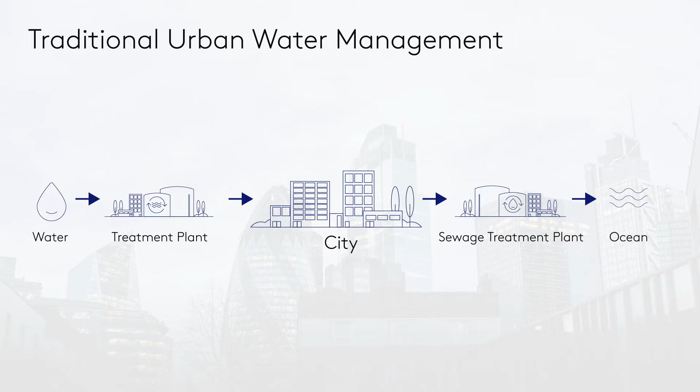And it's very good so far as it goes, but we're now seeing a lot of challenges in our cities that we need to address that aren't covered by that model. So it didn't consider things like the rainfall that was landing on the buildings in the city and how we might use that. It didn't really consider the whole issue of stormwater. They just included stormwater in their wastewater management, which has created another set of problems for their creeks and rivers.

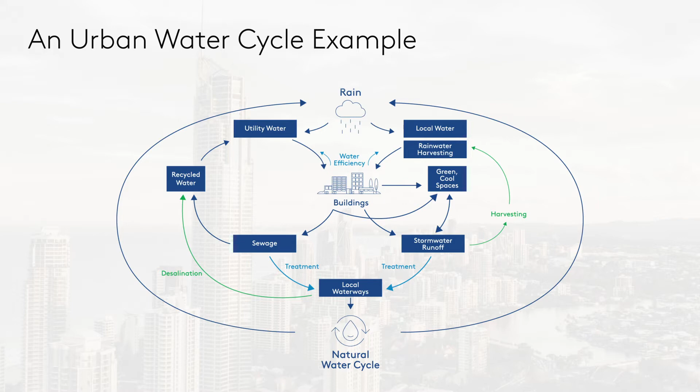So we think we need to change that language a bit. We need to be talking about a system, an urban water cycle that's happening, more discussion about the impact on the natural environment, and then obviously how buildings become part of that. And in order to understand the important role of buildings, we really need to look at how an urban area changes when it goes from a natural landscape, which is mostly grasses and forests, to a built-up environment.

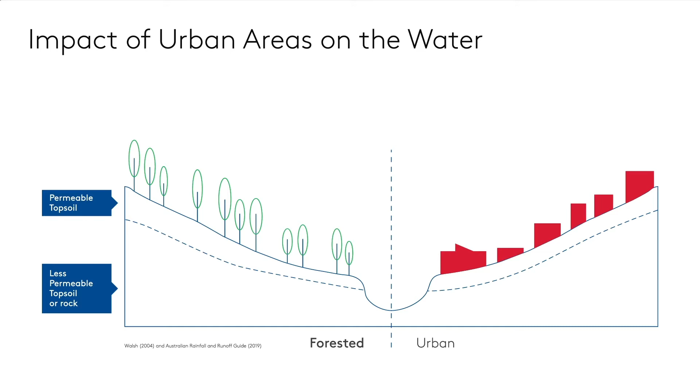And it's interesting to look at the numbers here. So in a more natural landscape, the landscape retains about 80% of the water. And that either infiltrates into the soil and becomes groundwater, or it evaporates and has a cooling effect, but it also becomes water vapor and can land again as rainfall.

When we urbanise, we see a very big shift. Instead of 80% of that water being retained, 80% of the water becomes runoff. So it very quickly runs off that landscape. So we have quite negative impacts on our waterways. We see flooding and we see scouring and a loss of that ecological habitat.

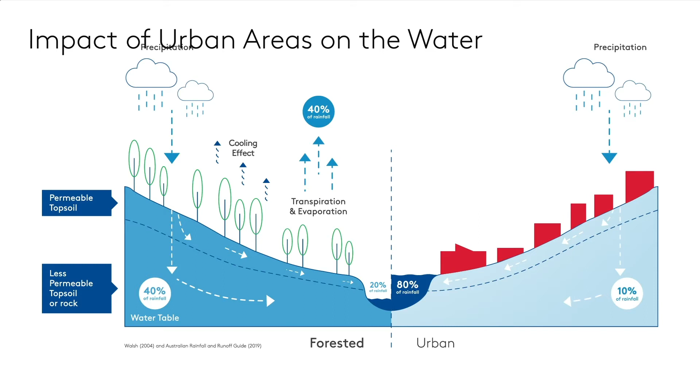But we also don't see groundwater. So the base flow, when it's not raining, we see a lot less flows in those local waterways. And we also don't see the levels of evaporation and evapotranspiration that have a really important cooling effect for our cities, but also create more rain.

So, one of the ideas that we start to talk about is that our cities are becoming deserts. We're seeing less rainfall, they're getting hotter and windier, and when it does rain, we're seeing flash flooding. So it's a pretty negative image, but it's one that we need to think about. And the great thing is that buildings can then become part of the solution and address all of those impacts to replicate that natural environment.

That's a great segue. Thanks, Michael. So if we did want to take a look further at the buildings, I think it's worthwhile to take that thought that buildings can be part of the solution rather than part of the problem. And that by changing the way that water is managed at an individual scale, at a single building or in a suburb or a town or at a wider scale, we can actually change the impact of a whole city and a built environment on the natural environment.

So we see an example of this where we're using now a lot of decentralized solar PV to generate electricity. So we don't need to rely on a great big infrastructure solution, and we can get small inputs coming into the system in the local area with less transportation and less infrastructure required.

We can use our buildings and think about our buildings in three different ways. The first being that we make them more efficient than they were before, so they consume less inputs from the external world, and that's things like insulation for power and heating, cooling costs there. But in a water sense, it's things like water efficient appliances, shower heads, taps, washing machines, things like that.

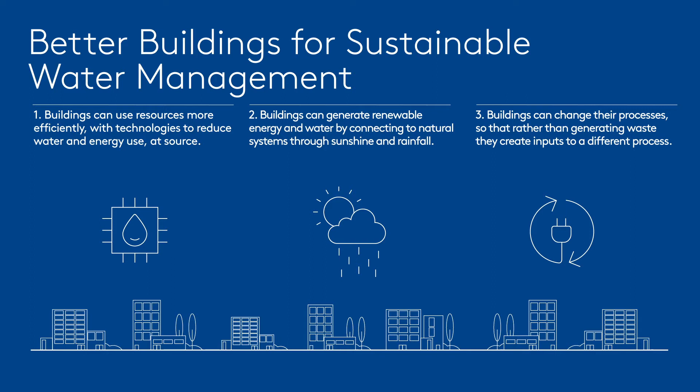So with these things in place, we can actually end up with a building that has a net positive effect. It's actually generating more than it's consuming. And you think about that in terms of rolling that up into a city scale, the buildings can actually make a massive contribution to the way a city's performing.

Stuart, one of the things that I'm hearing about a bit is this idea of a crisis, so that there's a sense of urgency around some of these issues and these changes. Do you think that there is a crisis? Is that something we're looking at?

I think you don't have to look too far to see examples of the impact of climate on cities, and in particular hot, dry summers and shortage of utility water supply. And we've seen notable examples in Cape Town and Atlanta in the last few years where whole cities of millions of people have been running short of water. And then at the same time, we get stories about whole cities having enormous amounts of floods and extreme weather events leading to peak flow of stormwater and flash flooding.

Both of these are very damaging problems and seem to be coming up more and more frequently in the last 10 and 20 years. Particularly what we know about the flooding situation is that it's a massively expensive problem. Floods are hugely damaging for cities, and we're seeing impacts there in the insurance industry where it's no longer cost effective or available to get insurance in some situations because the risk of flooding is too great and the cost associated is too much. It's interesting.

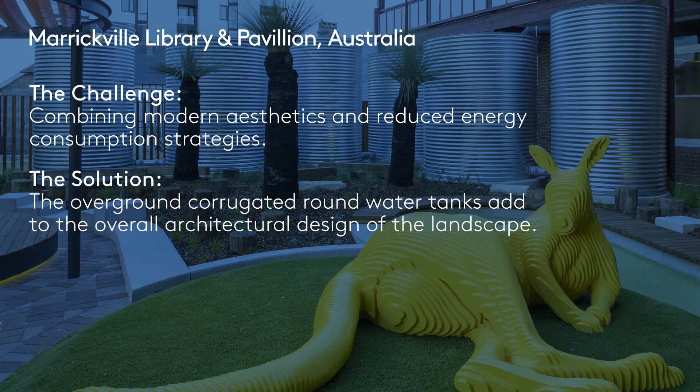And here in the picture you can see in the courtyard next to the library they've installed 6 large Kingspan rainwater tanks. This is an iconic Australian corrugated steel product in an Australian native landscape garden there. The 6 tanks store about 57,000 litres, capturing water from the roof of the library and filling up those tanks there. And then the water is reused into the public toilets and facilities inside the library there.

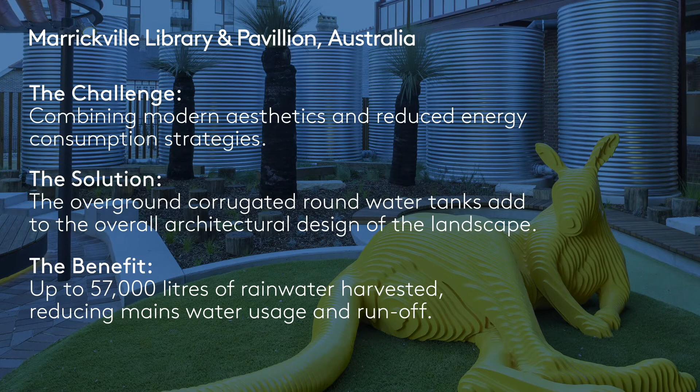So these 6 relatively small tanks have the ability to save about 400,000 litres of water a year that would otherwise have been piped in from a dam many kilometres away. So it's a really great example of using the water, reusing the water on site where it falls without having to treat it and without having to pump it long distances.

This site also, when these tanks overflow, which they do a few times a year, the water from that runs into an underground stormwater retention basin and is further slowed down and treated before it's let into the stormwater network. So it's quite a good integrated system there, and we've got a really visible example of using rainwater where it doesn't need to be hidden away, and it's part of a feature of a landscape garden as well. Yeah, it works well.

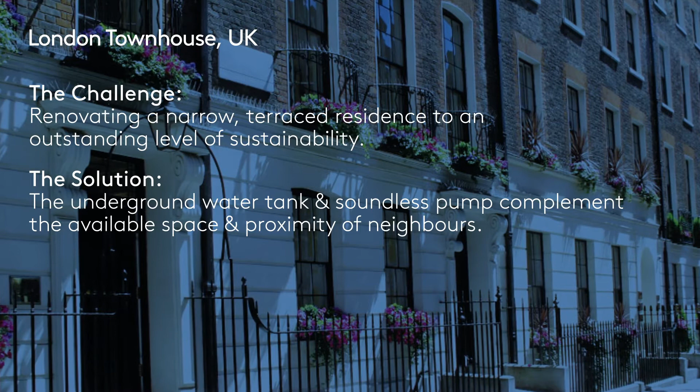And then they transfer the water up into a header tank in the attic space, and then the water is released by gravity down to flush the toilets through the whole building, and I think used for some irrigation in the gardens as well. So this is a really compact lot scale example of stopping the rainwater from leaving the site, reusing it through the appliances in the building, and just minimising the impact of that development on the natural environment.

Stuart, I'm curious on something like that. Are we talking very technical equipment? Is it a very expensive installation? No, that's a pretty straightforward installation. They'd have 2 small tanks there and 1 small pump, and it's quite straightforward and quite commonplace now to be able to be done on a residential lot without a huge impact on cost as well. Yeah, cool.

I've got one that I wanted to talk about. It's the library at the Queen's University in Belfast. So it's quite a large space. They can manage a couple of thousand students there. They talk about an ample area where you can look at 1.5 million books, which means that it covers a fair amount of area and has quite a large roof space. And there was a very strong sustainability focus from the building designers.

So they've utilised this roof space by capturing the rainwater from it. They capture about 2.5 million litres a year. That goes into an underground tank, and there's a fairly simple filtration process, and then they run that back through the toilet. So it's, again, an example of building into the initial design smarter ways of managing water, rather, as you said, than trucking it in many kilometres from another centre and treating it to a very high level, then it becoming part of the sewage system.

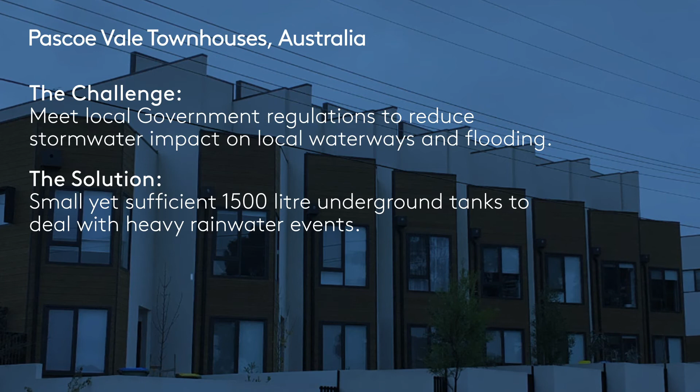And that, although quite small, is sufficient to deal with most of the small rain events that occur on that site, and has a really important difference to the quality of the water coming off it and the volume of the water coming off it in terms of local waterways and reducing the impact of local flooding. So they capture about 75% of the roof area into those tanks.

That's excellent. So Stuart, we've talked quite a lot about the design of buildings. Kingspan have been in this space for a long time. Can we talk about some of the stuff that we do that can improve the impact that buildings have on our environment? Yeah, absolutely. So I think we've talked a lot about rainwater harvesting, and Kingspan is a major manufacturer of rainwater harvesting products. So we produce a range of above ground and below ground rainwater storage tanks, as well as some quite large storage tanks for more industrial and agricultural purposes. We've got a range of storage tanks then in that agricultural space for fertilizer and fuels as well.

And in the water space, more generally, we've got integrated underground systems for stormwater and also for pump stations and water transfer. And then we've got some specialized stormwater products for separating oil and other particles out of stormwater networks. We've also got a wastewater treatment product, which is industry leading for treating on-site wastewater.

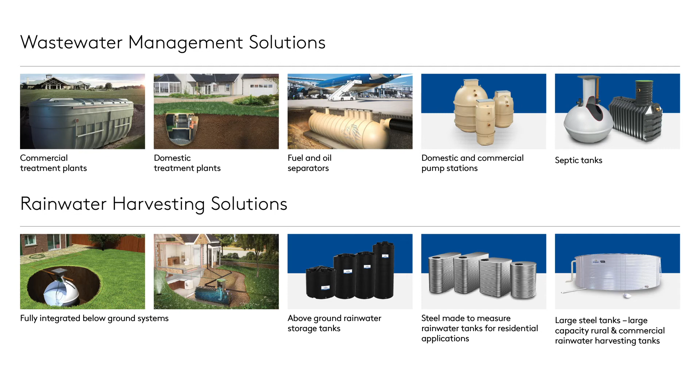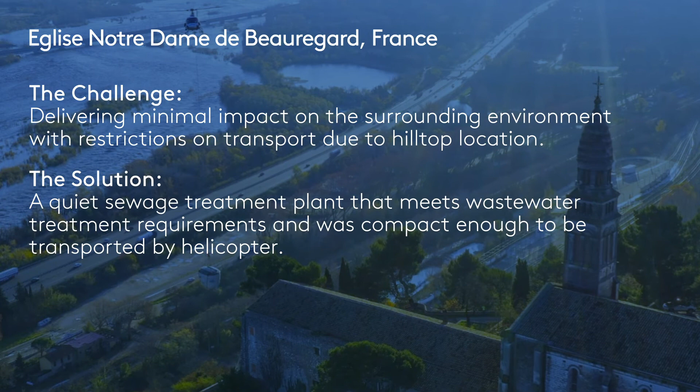Actually, on that, I've been looking at some material and a really interesting design solution. I think it's an old church with a restaurant and two artisan studios, but it's set in these beautiful grounds, which are obviously environmentally quite sensitive. So they needed a wastewater solution that didn't have a big impact, and they also didn't have good access to the site. So there's a helicopter bringing in one of our biodisc systems, and it's really quite nice, I have to say.

Okay, well, Kingspan this year has launched a massive initiative called Planet Passionate. This is a 10-year program for initiatives in climate. So it's really to address three major global themes on the environment, being climate change, circularity, and the protection of the natural environment. So it's really exciting for us to be part of this program and to really be involved in it.

In particular, one of the targets is around rainwater harvesting, and the target we've set is that in 10 years we will be saving 100 million litres of water a year through rainwater harvesting on Kingspan facilities. So at the moment there's over 100 buildings that Kingspan owns around the world, and we've already started to install rainwater tanks on these buildings. I've been in this industry for quite some time, and I've not heard of a world program like that before. So it's exciting to be part of something that's quite ambitious.

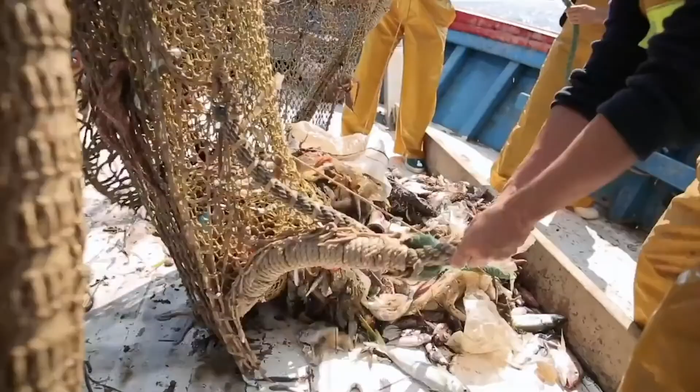The water theme is continued also. We're quite concerned about the oceans, and we've joined with a not-for-profit group called EcoAlf, and they're working with fishermen in the Mediterranean to retrieve a lot of plastic waste from there. We're looking at up to 150 tonnes a year. So we're going to be doing that, and we're also looking at doing 4 ocean cleanups by 2025. Wow, thanks, Michael. That sounds like a huge project.

Just to talk about some examples of the rainwater harvesting target on Kingspan's own buildings. So firstly, we want to look at the IKON building in Kingscourt. This is adjacent to the Kingspan Group headquarters there. We recently developed this new building using a lot of Kingspan's own products as a showcase of the kind of design that's possible now using modern building materials. And as part of that design, we've installed rainwater tanks in the basement of the IKON building, and those tanks are capturing the water from the roof of the building and reusing that through the toilets in the building. So just to showcase exactly what's possible on a nice, neat, architecturally, I think quite good looking building in a countryscape in Ireland.

The Kingspan Water and Energy Facility in Rokietnica in Poland has also already installed rainwater harvesting tanks. In that situation, they've got a 20,000 litre tank connected to about 3,500 square metres of factory roof area. So there's enough roof area there with even modest rainfall in that region of Poland for them to refill that tank, I think, about 80 times a year. Again, that water is being used back in the toilet block in the building, so all that water is reducing consumption of the mains water that was otherwise being used.

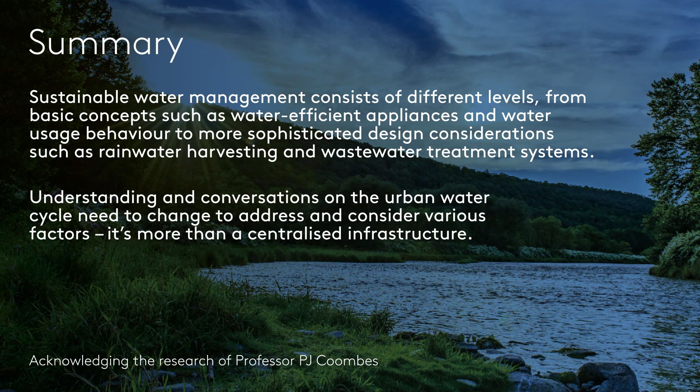Thanks, Rod. Just to summarise then, what we wanted to cover here is sustainable water management and making sure we have a clear understanding of what is meant by sustainable water management. Also really understanding the urban water cycle and trying to change the conversation around what an urban water cycle is, understanding that it's more than just centralized infrastructure, and there are a lot of inputs and outputs and varying factors. And lastly, probably most importantly, the key to an urban water cycle really is the buildings, and it is possible for buildings to be part of the solution and not just the problem.